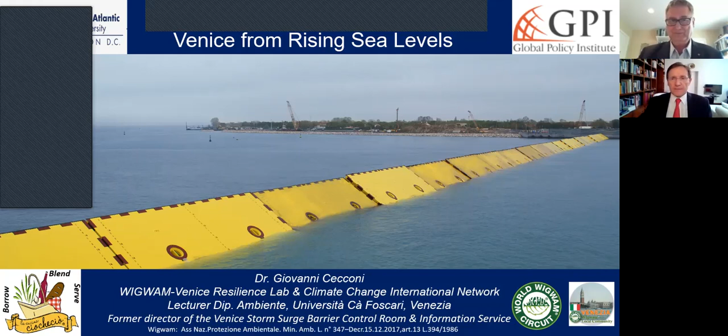Okay, Venice by itself is the history of coevolution.

Giovanni, we lost your voice. You are on mute. I was trying to remove the video because I cannot see the slide. Okay, it's better I don't touch.

So it is the history of coevolution. Coevolution is the competition and cooperation all together among water and land, the environment and the civil society, and the very secret of Venice relies on this.

And now we have to face conservation and development. Again, there must be a competition between conservation and development.

Venice is a very complex system. It's a natural lagoon, an industrial harbor, an historical city, and it has been able to maintain itself for 1,600 years. This year, by the way, we are celebrating the birthday of Venice with great celebration.

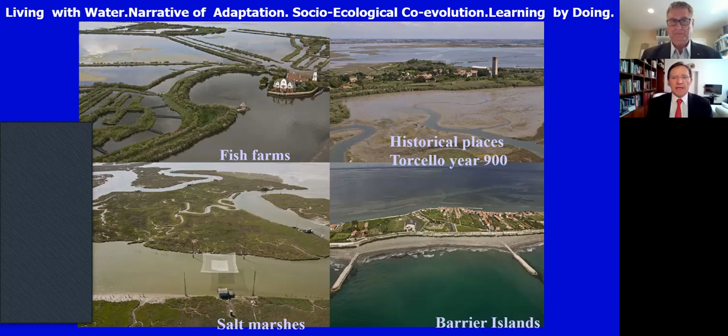Here you can see, before human intervention, the shift in the archaeological remains from Neolithic, Mesolithic, and Bronze Age due to the oscillation in the mean sea level.

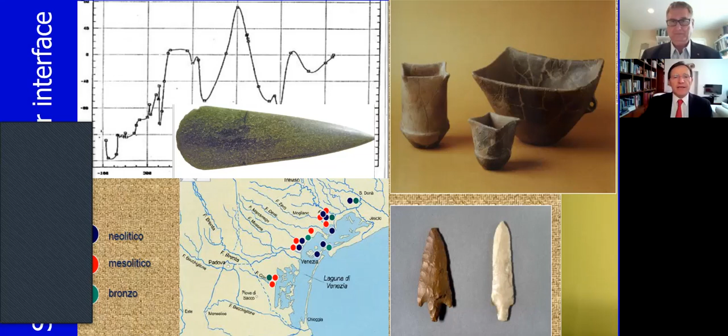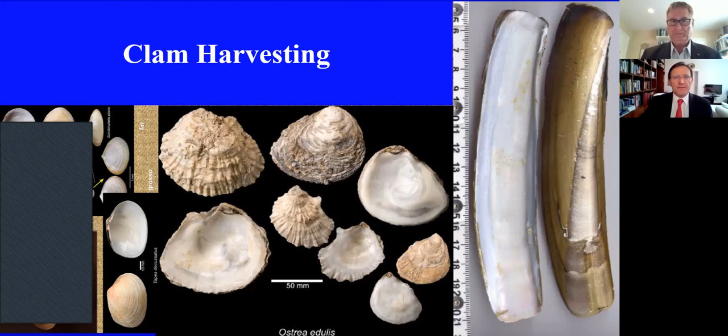But then humans entered the lagoon. They arrived searching for food, hunting and cultivation, harvesting clams, fishing, fish farming, and then they had to cope with nature because the natural system was unstable.

So with this claim, with this speech, a mathematician in 1875 asked for installing a solution. Leonardo da Vinci studied the possibility to use the natural energy of nature, the tidal energy, to flush the sand away. And this was done, but only 50 years later.

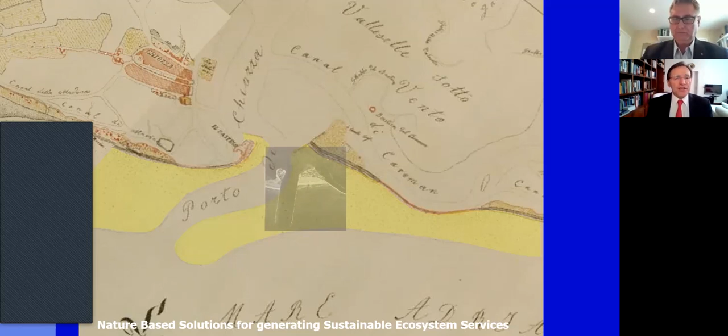This intervention can resemble a very much impacting transformation. If you do an environmental impact assessment, maybe you fail in getting the authorization. But at that time, there was no VIA regulation, and the work was done.

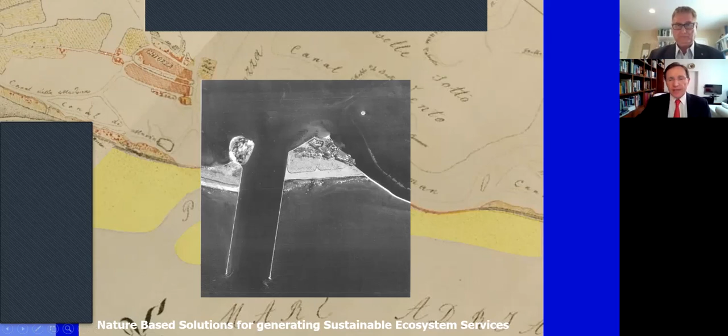And if we look now at the consequences of this huge transformation, imagine reducing the tidal inlet to one third, installing this huge inlet breakwater in order to concentrate the tidal current, make it quicker, faster, in order to scour the sand below. Bene, then what has happened?

Here you can see the site of the construction of the inlet breakwaters in this location. And we had a very long discussion installing the navigation lock to enter the lagoon when the barriers are closed in this location, because they are close to one of the most renowned natural areas that is protected by European regulation.

So the end result of that previous transformation is this magnificent dunes park in which there are many species and biodiversity. Now, my question to you is why humans are able to trigger such amazing natural transformation?

The answer is based on two constraints, two positive outcomes. First of all, availability of space. When you interact with nature, you have to give nature the space to grow. In here, there are plenty of space. In fact, this pocket trapped the littoral drift, and the wave energy and wind energy piled up the sand, and then the sun started to grow the Ammophila, a special plant that stabilizes the sand in the dune system. So space is a constraint that in this case was well respected.

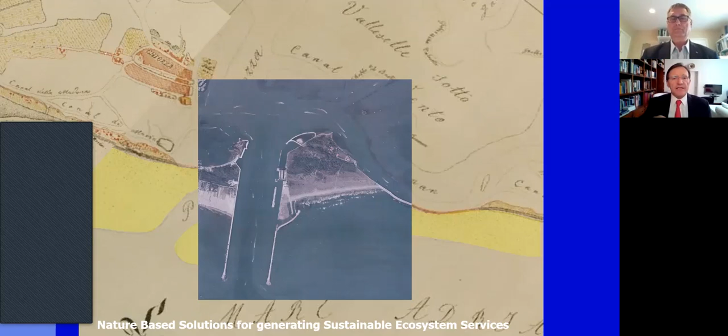Another important aspect I want to stress is the landscape you see at the very wide scale starts at the microscopic interactions among the sand, millimeter size, and among cyanobacteria and other organisms that provide stability to the sand, as is the case in this footprint. Again, this is a shelter, and in this shelter you have protection in which you can trap the nutrients and the seeds, and then in the following year you have the best melting pot to have the Ammophila.

To have the halophytic vegetation that lives in the brackish water start growing.

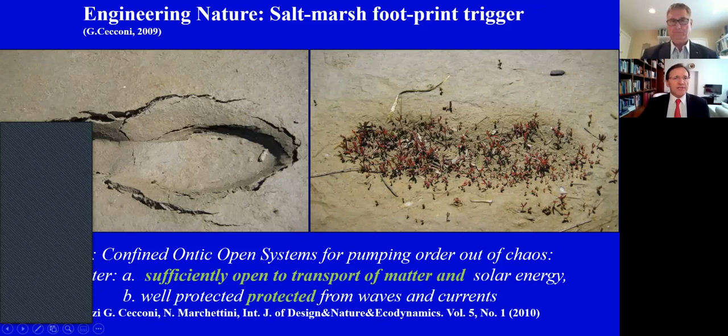We published this understanding of how nature is working in a publication here. You can see in the International Journal of Design and Nature Ecodynamics, together with Professor Tiezzi.

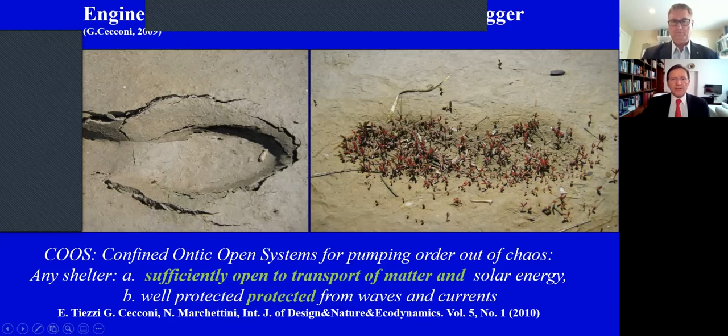And we called this behavior COOS, confined ontic. Ontic is the capability to preserve itself without awareness. Open, you must be open to the flow of energy and matter systems. And these systems are able to pump order out of chaos, providing a well-structured and fruitful environment.

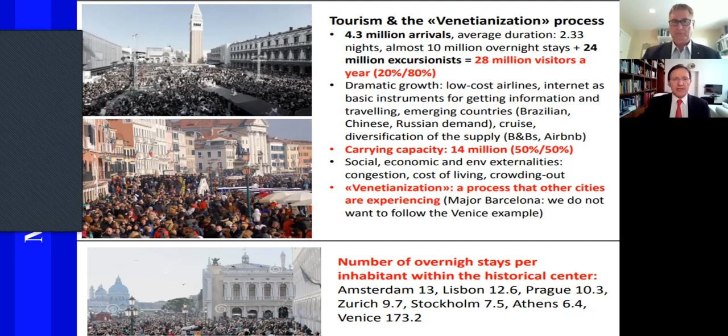But Venice is also a place in which we have mass tourism. Before COVID, we had a very serious problem coping with this flood of people entering the city with huge ships. This is because humans forgot about the equilibrium with nature.

So now we want to exploit nature in a very short time, to be in Venice in just one day, half a day, half an hour to commute from the airport to San Marco, and then go into our magnificent cruise ship and continue to travel in the Mediterranean.

This is not co-evolution between society and nature, because as you well remember, in order to be fruitful, this cooperation needs space and time. Instead, here, everything is concentrated. And so that's why it is a negative impact.

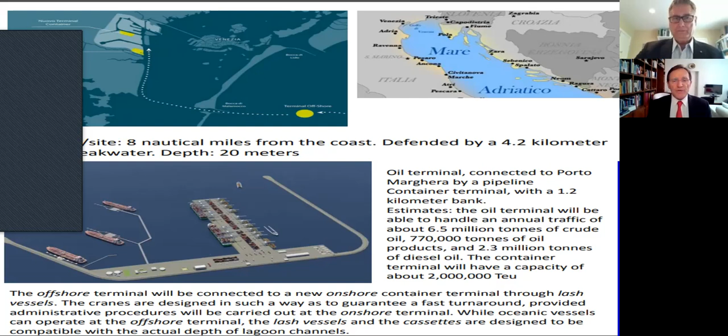Whatever you do, the impact remains because we want to travel faster. And this is the problem. Why not transform the time of travel into an opportunity? This is how nature is working. For nature, there is no dead time. Nature is continuously active to maintain its possibility to survive. And so we have to behave accordingly.

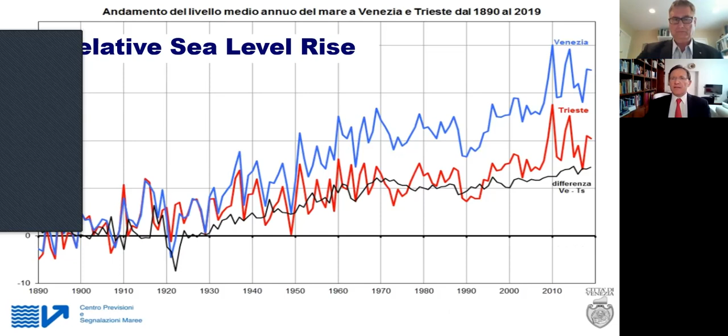Sea level rise is another challenge. Here you can see Trieste and Venice. Trieste is in a rocky area, so it's very stable, not affected by subsidence, which is the squeezing of the soil due to tectonic motion and to compaction. Instead, Venice has a weak soil, while Trieste has hard soil. And so you can see that in Venice, the sea level is rising twice as fast as in Trieste.

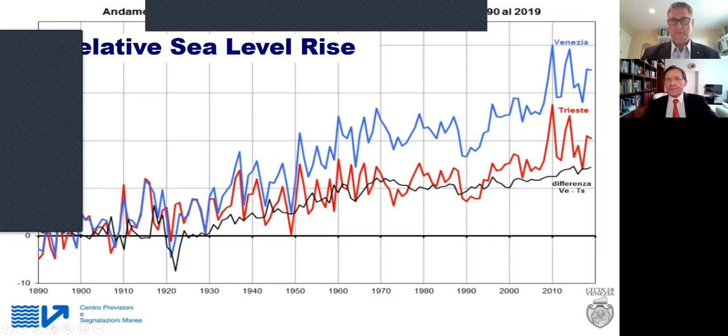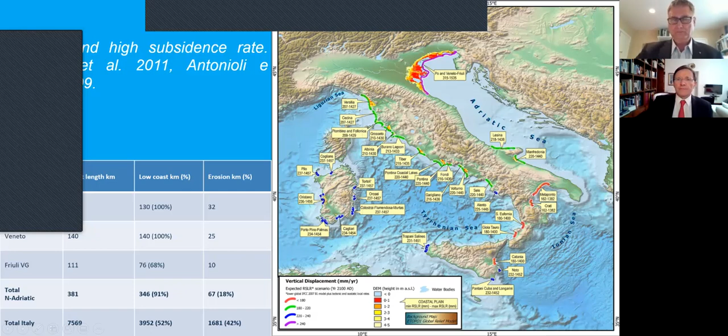The flooding is more and more frequent, and the city is flooded with higher water. Here you can see the duration of the flooding from the beginning of the century. It has been amplified by a factor of 20, and also the surface that is impacted.

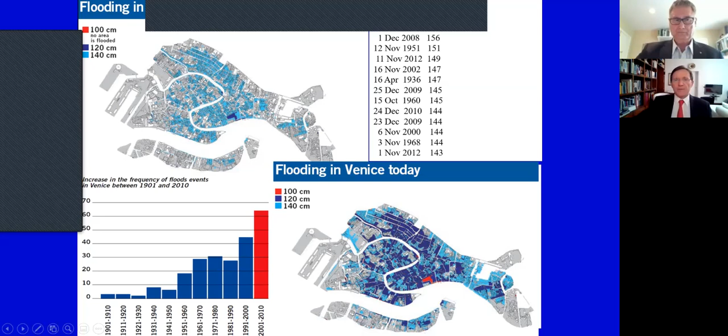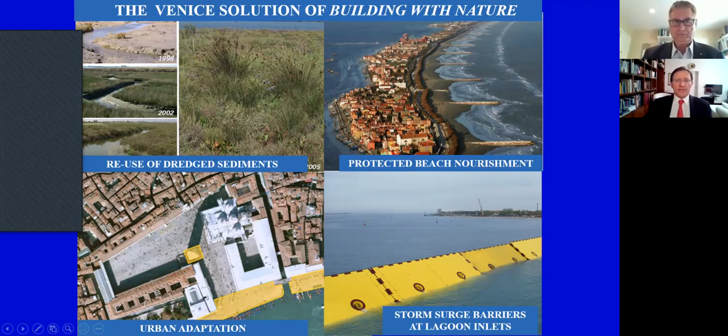The Venice solution is a combination of engineering, nature, learning and building with nature essentially, and mobile structure coupled with local protection. So we are raising the bank of the city as much as we can in order to maintain the city open. Do you remember the openness of the course? If we close too much, the city is not working. So we need to keep the city open, but at the same time protected, confined in a way, and the confinement is provided by the flood barrier. So again, the flood barrier and the local protection is the proper balance between openness and closure.

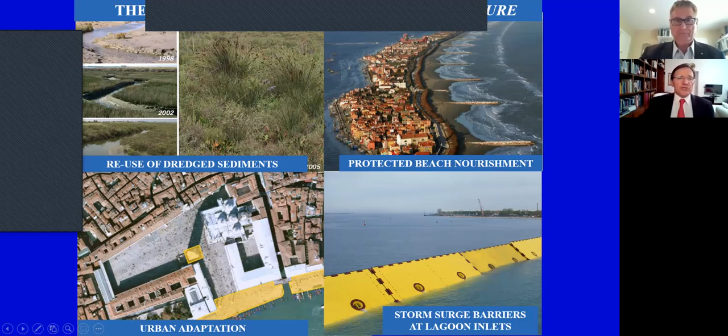This is associated with a huge reuse of sediment, sandy sediment at sea to protect the beaches, and muddy sediment inside the lagoon to construct salt marshes. This is the general scheme of intervention: a combination of a mobile barrier, coastal protection, local protection, the safeguard of the polluted sites of the past, and the local protection of historical islands.

Till now, 56 kilometers of littoral has been protected with more than 8 million cubic meters of sand, 12 kilometers of artificial dune with replanting of Ammophila has been reinstalled, and also the inlet breakwaters have been armored for a total span of 11 kilometers.

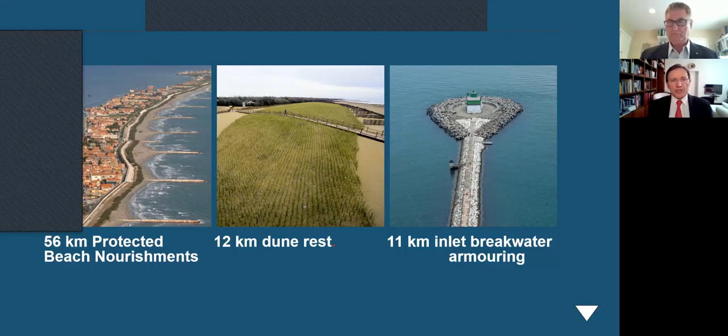Just to give you an example, we are speaking about a project in the order of 12 billion euro. Katrina required 36 billion euro, most of them to build dikes and levees. But of course, the size of the Delta of the Mississippi is 10 times the size of Venice, and the subsidence of New Orleans is much higher than the subsidence of Venice.

At a certain point, we have to think about whether adaptation and resilience is the solution, or if we have to retreat. It will depend on us. If we are able to stop sea level rise with better sequestration of CO2 and change the composition of the atmosphere in our favor, then maybe we can continue to strive on the coastline. Otherwise, we have to consider to retreat.

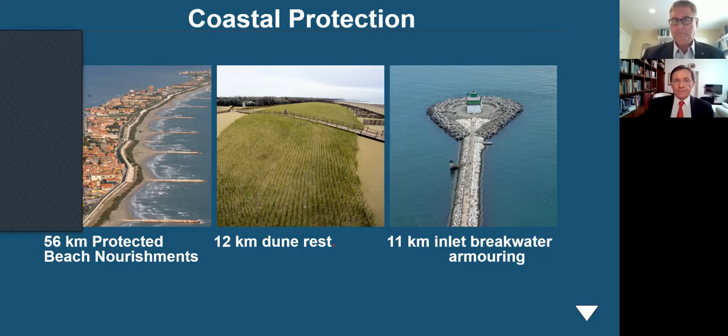For now, because we do not have any more subsidence, since we stopped the extraction of water in Venice in 1970, we can afford this solution: to install an artificial beach protected by groins and submerged breakwaters in front of the seawall, in order to reduce the impact of the wave.

But if sea level rises, let's say, half a meter, this beach will rapidly disappear because of the reflection of the wave energy against the seawall. This flexible solution is added on top of a rigid structure and cannot survive, even though it's well designed, if you change the environmental conditions. This just explains the limits of adaptation in case sea level rise happens at a speed that was not experienced before.

Other solutions refer to the reconstruction of salt marshes, reusing the dredged material from the maintenance of the harbor and navigation channels. I want to come back to this because a similar solution is in place in Galveston, Texas. And now in Galveston, my colleagues are considering installing a big storm surge barrier in the Ike Dike, as it is done here in Venice.

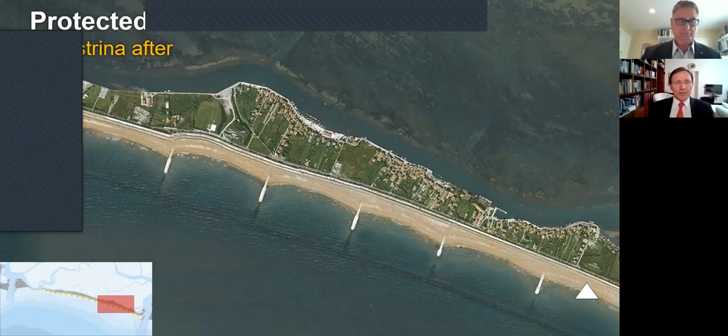We shared experience with them, and it was very interesting because for us it was a way to go back 30 years, when we were in the very beginning envisioning this future of a protected lagoon. Now looking at them taking the first steps, trying to raise consensus with public participation, for us is a way to rejuvenate ourselves. So please come again and visit us, we are more than eager to share our experience, because this is very much triggering our enthusiasm in what we are doing here, in a peer review fashion.

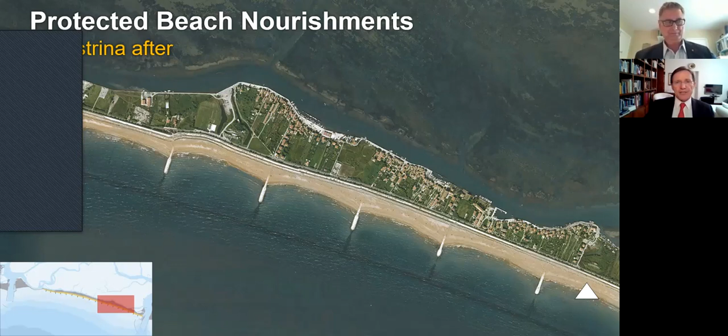So salt marshes, I said, also 39 kilometers of armoring of salt marshes, similar to what is done in the Mississippi River delta with Christmas tree branches or oyster reefs. These kinds of activities are important, not only because we help nature to help ourselves, but because we develop a community. People can do that kind of job with their bare hands, with small boats, and in this way stay connected.

Another important attribute of adaptation is interconnectivity. And interconnectivity is fundamental for resilience, because if something happens, a citizen will ring the bell and everybody will come, sharing the solution and sharing the experience, and the problem will be solved.

Instead, if you have a centralized system of supervision and control, at a certain point the unexpected comes and the system will fail because there will be nobody on alert at that moment. So the circulation of knowledge and awareness is very important, and this can be done only if you are able to pay for connectivity.

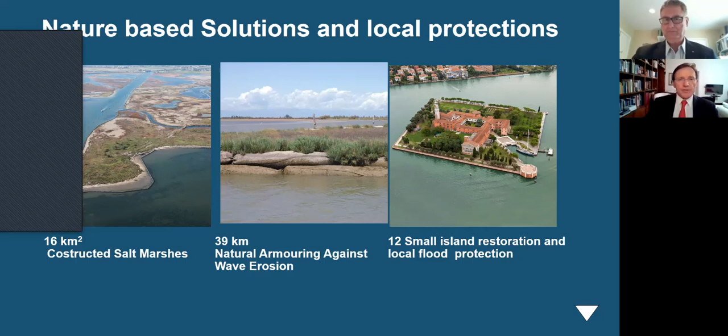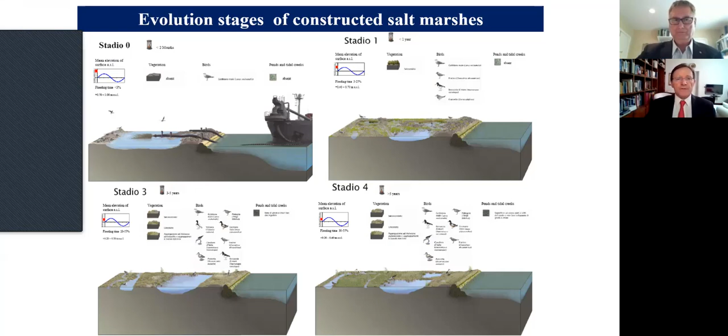But how to pay for connectivity? This is the purpose of the Lab, to create a connectivity machine that keeps the people connected in any possible way. These are the evolution of the salt marshes, the different schemes. I rushed here because this will be another lesson next time.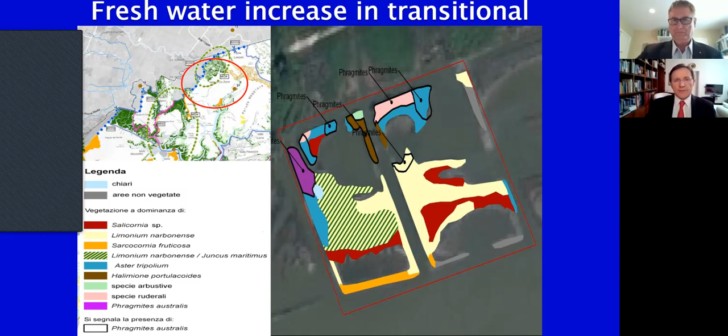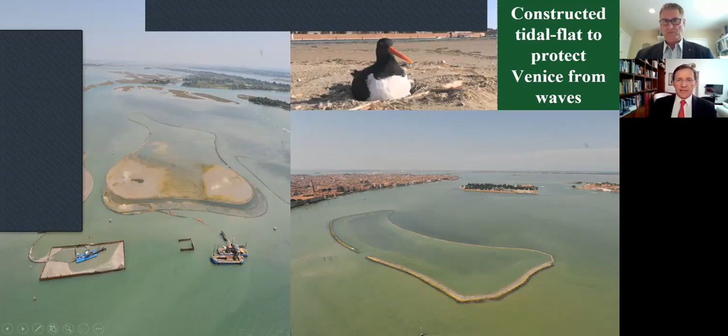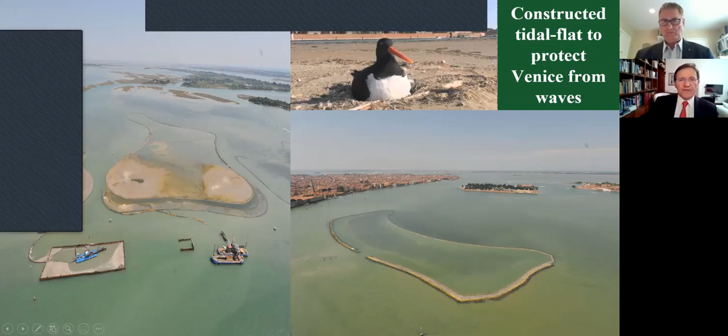You can see how it was done. Just an armoring with gabions. Gabions were deployed by this inner canal. Here you have to see that the canal was dredged internally in order to make stronger the edge that is facing the motorboats, the waves, and away from the wind. And then we filled this area with the sand from the excavation of the foundation of the barriers.

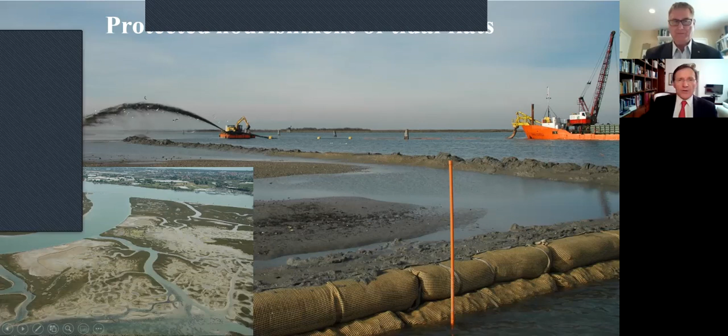Similar activities. We developed a special gabion made by geosynthetic and small stones or oyster. This is where you can see the historical pond for keeping the juveniles that will be sold to the fish farmers. This activity dates back to the 1500s. So what we did was to restore the edge of this salt marsh, hosting the fish farm, the fish pond, with new land in front.

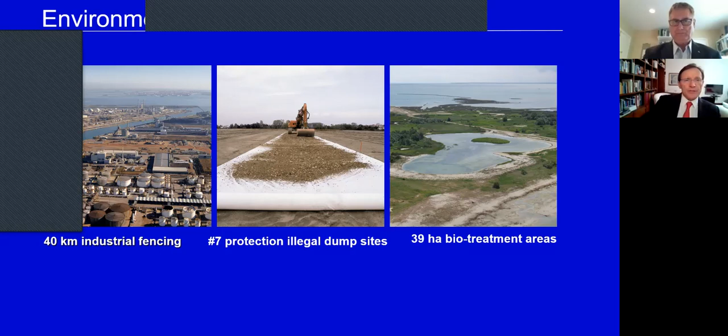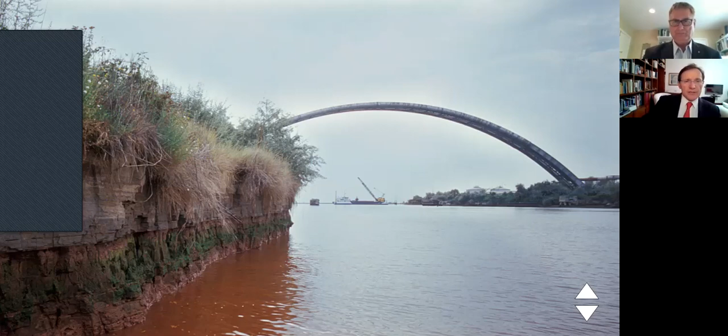This is instead the reclamation of the industrial areas that were polluting the lagoon because of the lack of a confining wall. Here you can see an example of a bauxite deposit polluted with mercury that was stabilized with this sheet piling.

Local protection. These are very important because if we want to protect Venice with mobile barriers, we would have to close almost every day. This is not viable because of the impact on navigation and the cost of the operation. At that point, it would be much more convenient to close Venice inside a ring and allow the tide to enter in and out of the lagoon. But before reaching that time, which may come in one century if we are able to stop sea level rise due to global warming, or in just 40 years if we do nothing, we have to live with this kind of solution. That is local protection.

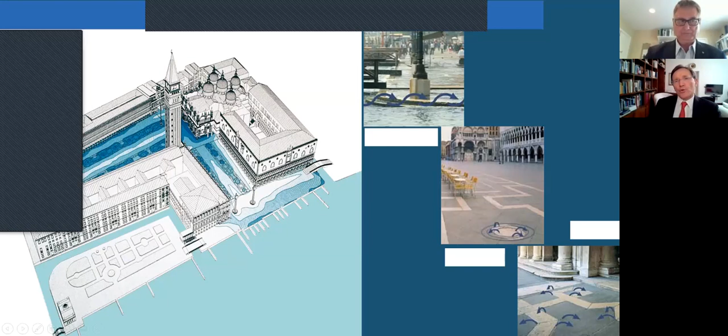100 kilometers of embankment have been elevated by 10, 20, 30 centimeters. San Marco Square has been delayed because of architectural reasons and authorization. In the beginning, we thought of this kind of solution to avoid seepage of water from the drains, from the ground, or overtopping of the bank: modify the elevation of the square, raising this area and installing a bentonite geomembrane all over the square, a kind of inverted pool. But the interaction with the marble was so big that the superintendent of fine arts decided not to go ahead with this solution.

So the present solution is to intercept all the conduits that are discharging rainwater to the lagoon, but also importing salt water in front of the basilica, in this area that is now flooded more than 200 times a year. Of course, we need to modify the slope of the pedestrian walkway to reach an elevation that is 10, 20 centimeters higher. There are special spots, like this corner of the Doge's Palace, in which we have to install some steel or glass plates.

Apart from this, we will maintain the conduits and put inflatable balloons into these restored conduits in order to automatically stop external water from entering. The work was scheduled to start on the 1st of February, a few days ago, but due to bureaucracy it has not started yet. This is one of the tasks of the Venice Lab, to facilitate the understanding of the bureaucratic problems and weak points with better interdependency between the user and the provider, in order to solve the problem as quickly as possible.

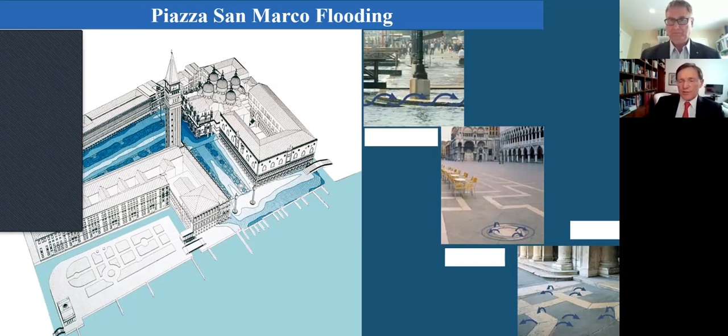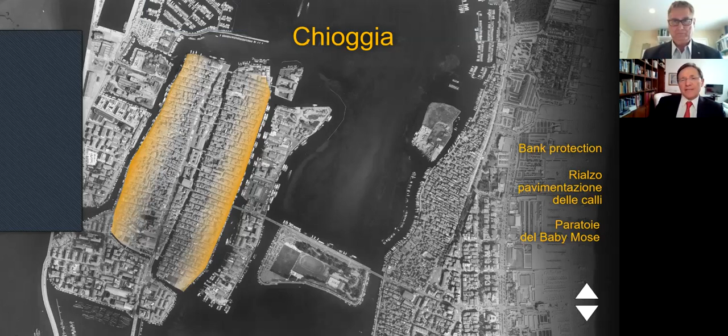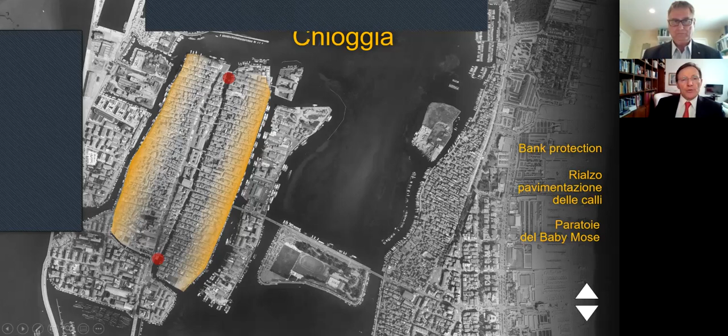Instead, in this case, we were lucky because we could raise the pedestrian walkway and install two gates at these two extremes. So in this way, all the area is protected. This is one of the gates. But these local solutions are not infinite. At a certain point, you have a limit, because if you continue to raise the pedestrian walkway, you need to raise also the roof of the building. This means to demolish and build on top.

As a famous archaeologist said, Venice has a tradition of building on top. You have to continue to demolish and build on top. But of course, not everybody agrees with this building on top. And Hammerman made a very, very strong criticism in National Geographic. You can read it, saying that the barrier is artificial, so we have to demolish and build on top. Of course, yes, very simple.

But we are not in India, in which whatever is new is nice and is interesting because they are more spiritual than us. We need our artifacts, our memories around. We are different. So any culture has its own limitation. In our case, we don't like to build on top. And that's why we try to install the barrier.

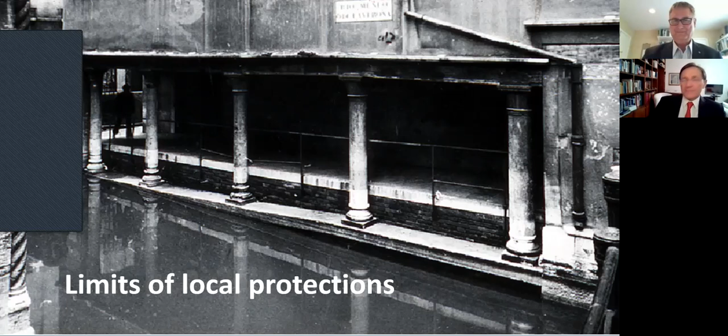Let's look at this film if it's working. So I relax a little bit and then we restart.

Thank you. So the solution is the installation of a mobile barrier at the inlets separating the lagoon from the sea. Here you can see Lido entrance, Malamocco, and Chioggia. In Lido there are two canals, so there will be 21 gates, 20 meters wide, at a depth of 6.5 meters, then 20 gates in San Nicolò, 12 meters depth. Malamocco is the deepest, minus 14 meters, because here is the navigation channel that goes to the industrial harbor. And there will be 19 gates.

So this means that the width of this inlet is 380 meters. These are two inlets of 420 and 400, and Chioggia has a width of only 360 meters. So altogether it is a mile, 1,600 meters. 78 gates, 4 inlets. So this is the mobile infrastructure. Of course, when these barriers are closed, we have a full protection of the littoral that has been reinforced with beach nourishment and seawall. And also the rivers entering the lagoon have been redirected out.

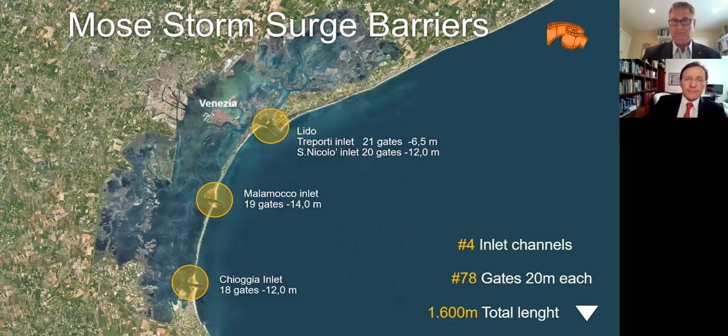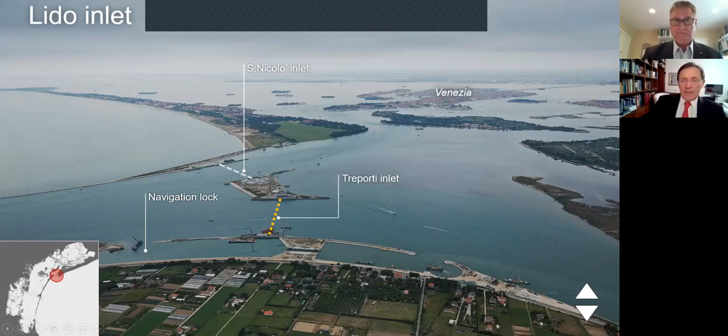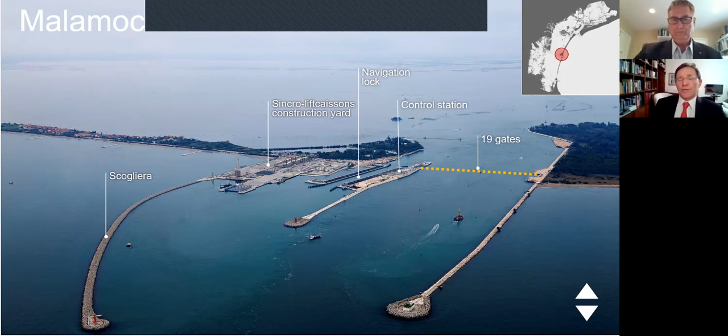These are the kind of constraints that we have here in Venice that are delaying the work, even though the work has been operated during the last 3 months almost 20 times, avoiding the recurrent flooding with very great success, as I will explain later. But it is incomplete, of course, because of the bureaucracy, because of the constraints, because of our Italian attitude.

But it is working, it is effective, as you can see in the CBS broadcast that I will distribute through the chat because we cannot see. So you have the witnessing of the functionality; even though imperfect, it is working. Maybe this is the secret of the flood barrier, an incredible solution for an impossible problem.

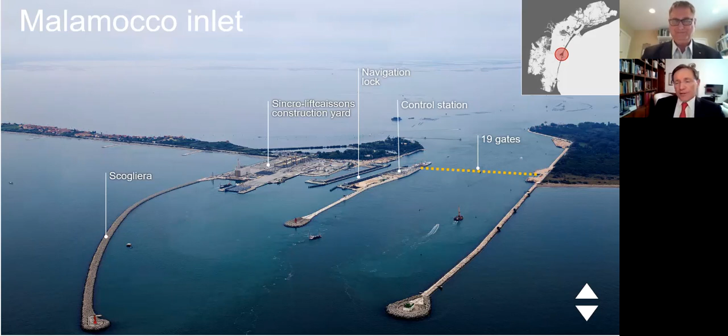Chioggia. The system is made of a reinforced foundation made of concrete. It is precast and then lowered into position from a dry dock that can be done above sea level or just in a bay that will be inundated later.

The most critical mechanical aspect of the barrier is related to the hinge that has to allow the motion of the gate from rest position to working position, and at the same time to allow the air to enter in order to raise the gate, and allow also the possibility, with a twist lock, to disconnect the gate every 5 years for maintenance.

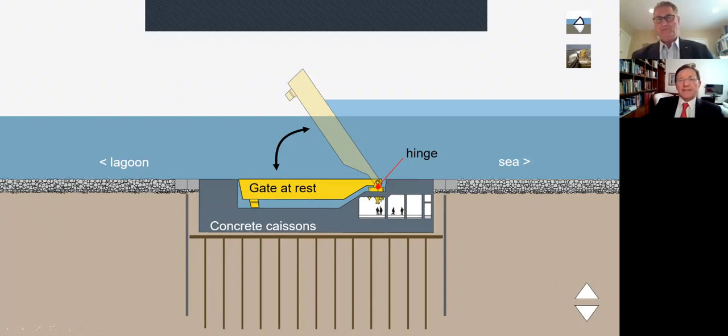This is how the gate is functioning. At rest, we start injecting air in this upper chamber. And when the momentum is able to compensate the load of the gate, at this 300 tons, the gate starts to rise. The pressure of the air reduces, and so the volume expands, and so there is an acceleration, and very rapidly, in a few seconds, the barrier will emerge.

Then, adding more air, the water can exit from a hole at this end, and so the system can stay in position with 3 meters at sea and 1 meter or less in the lagoon. When the operations are finished, it is enough to allow the air to exit inside the tunnel, and automatically the water will enter from this hole that is continuously open without any mechanical device.

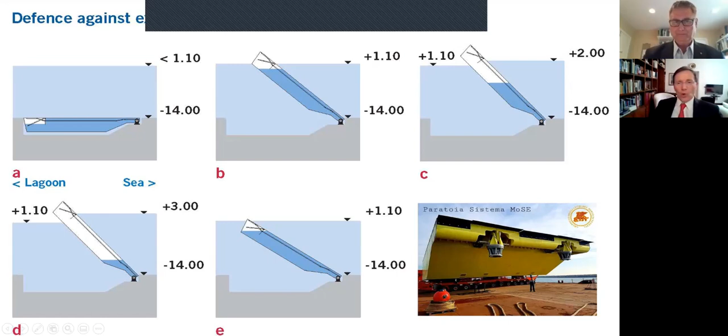So this system has no valve at all. All the valves are in the dry place inside the tunnel, and it will go down accelerated, and that's why there are dampers, as you can see. These are the dampers to stop the acceleration when it falls back.

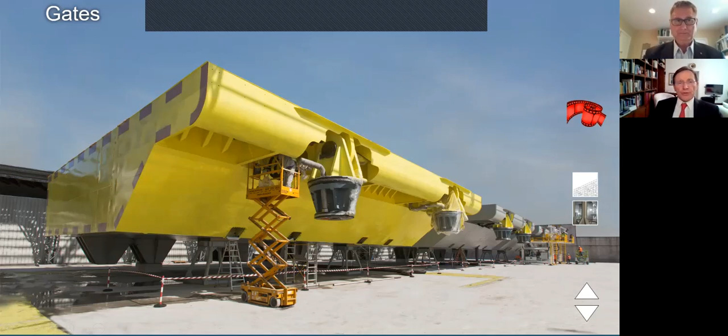The solution was chosen among many other kinds of gate, as you can see. We did more than 500 million of studies, investigation, and experiments during the first 20 years of the project. And this solution, for instance, with the intermediate piers, is cheaper but much more dangerous and not viable for Venice because of landscape limitations.

In London, there were 2 accidents. They decided to have the same gap as the London Tower, that is 60-meter piers, every 60 meters. And they had 2 accidents. One was very bad because it was a dredger that collided against the pier.

Rubber is also inexpensive, but for such a long span without piers, it's difficult to reach more than 150 meters, at least 20 years ago when we did these evaluations. Now maybe there are other kinds of material that will allow this balloon to be operated in a more robust, resistant, long-lasting solution.

This solution is also very interesting, similar to the Rotterdam system. This is a barge that is kept in a dry place aside, and brought into place just by removing the water and allowing the boat to sail to the location. But in our case, in order to have a dry dock for the barge, we would have destroyed the historical fortresses at the two sides of the entrance.

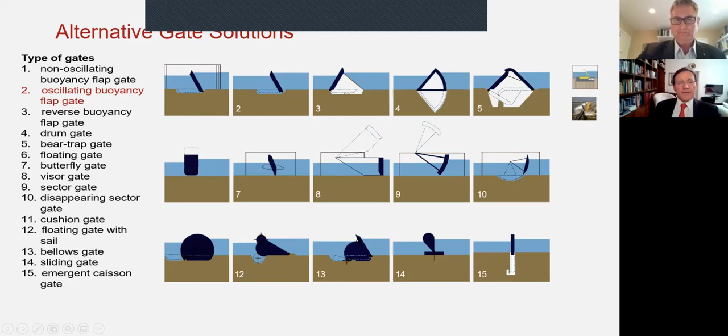Also, the weak point of this is that it is good in places without waves. If you install it in a place with waves, such as the Malamocco navigation lock experience, it will be put into motion, and the load is so big that when it hits the bottom, it will destroy any kind of foundation you can figure out, like a big hammer. In fact, this has been applied in Rotterdam and other places in which there are no significant waves or long wave oscillations.

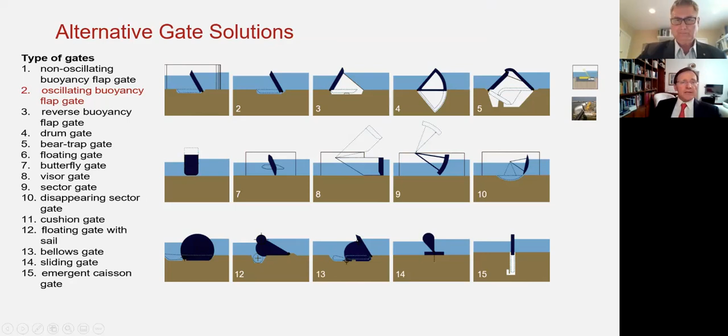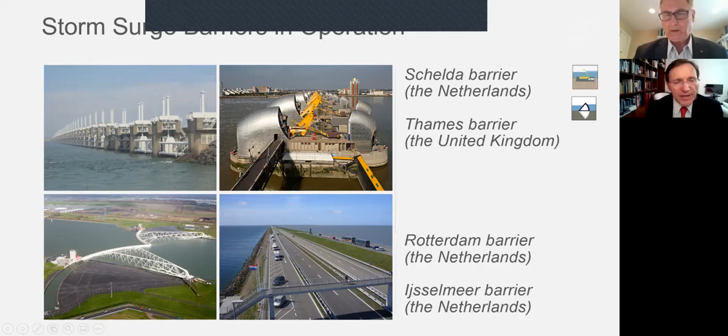So one aspect is the size and the shape of the steel structure. The other is the requirements and the operability of the structure according to the environmental conditions. So I'm not saying that you have to use the MOSE barrier. I'm saying that our solution was very challenging and not so simple compared to these other barriers.

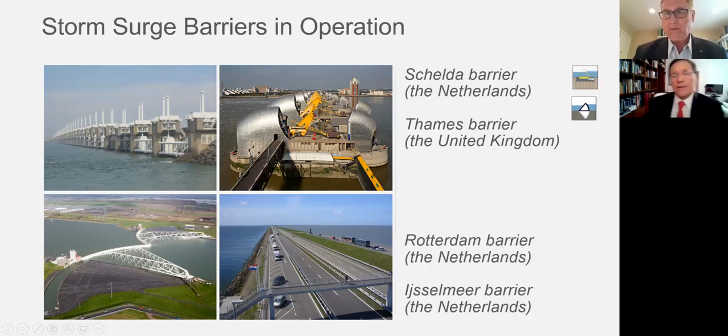Giovanni, we should probably leave some time for questions. Yes. How many minutes did I speak? So we have now another 5 minutes. 5 minutes. So I go to the end. 5 minutes to the end of the presentation. Yes. Then how much time do we have for the discussion? 5 minutes. So I need another minute just to wrap up.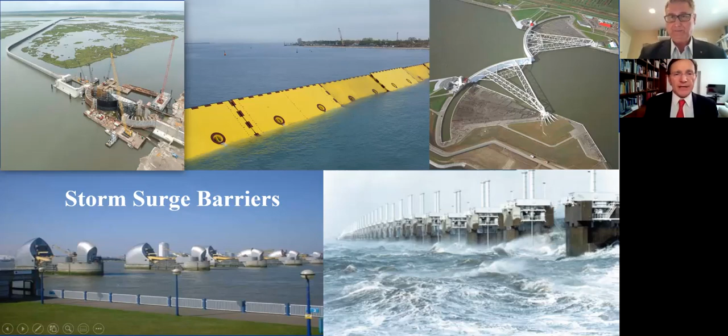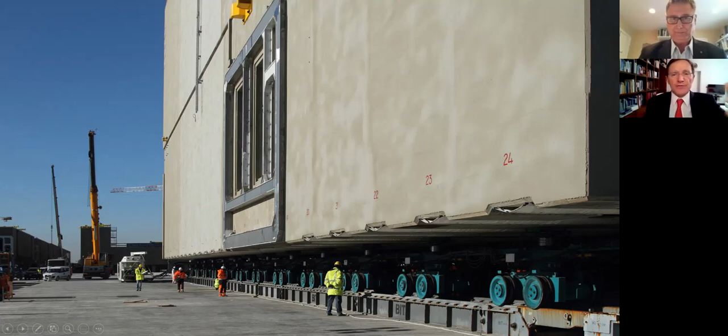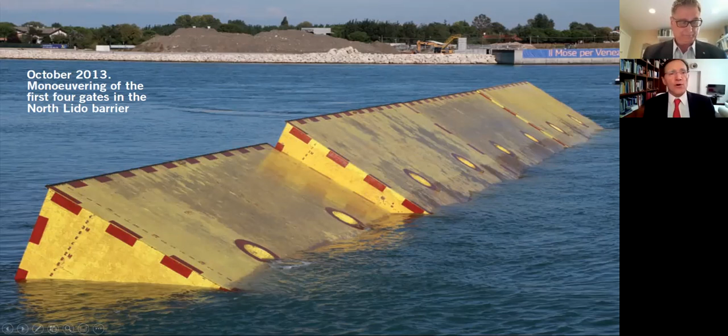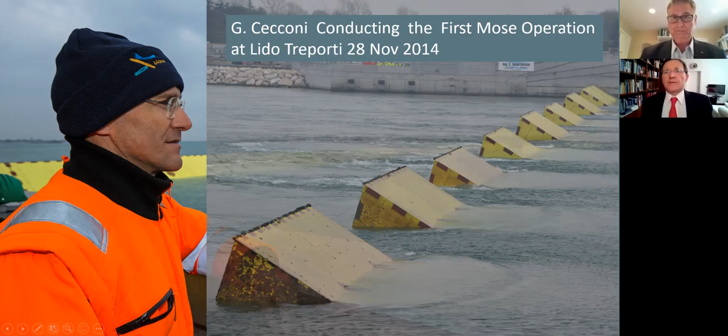Okay. So here you can see the barriers, how they are made, the monolithic caissons that were transported over rails, then to the lift, and from the lift to the water. This is what is inside the tunnels, the special hinge, male-female coupling. The first operation was done for the first 4 in 2013. I managed the rising operation in November 2014. Just incredible, it's 7 years ago.

Here you will see on YouTube the film, in the chat. The operation was started on the 3rd of October with the first testing, and it was decided to operate the barrier, even though incomplete, in a flexible way. The maintenance is very important. We have to decide if we keep it in Venice as a way to trigger the economic development of Venice, different from tourism, or bring it far from the city.

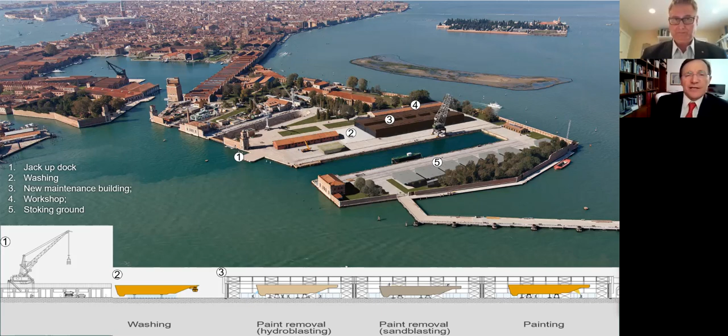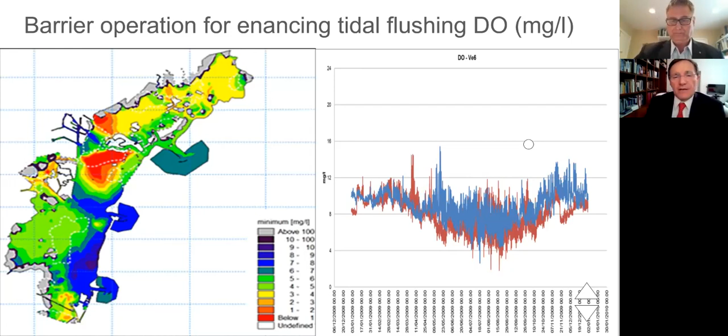The handover of the barrier is expected to start on 1st January 2022, so at the end of this year, to the new authority that I expect, if you sign my petition, will be ALMA, Agenzia Lagunare Magistrato alle Acque, to go back to the historical institution of Venice over the last 1,600 years. Thank you.

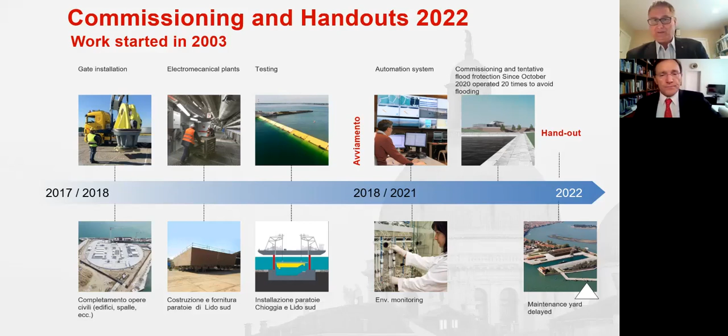Thank you, Giovanni, for this very comprehensive presentation of this project. We see that it is not just the barriers, but includes a lot of other structures that have been constructed in the lagoon and in coastal protection along those

breakwaters. One question that I could have, if I may: if you want to give us an overview of the principle and the factors that will affect the full or the partial closing of the gates. Can you repeat? Because I was reading a question, I was distracted. So, just if you want to give us an overview of the principle and the factors that will affect the full or the partial closing of the gates.

Essentially, we can use completely closing the full lagoon or use the hydraulic impedance. The flooding is modulated by the astronomical tide. So every 6 hours it comes up and then goes down. This means that we can use the time of travel of the water and use the capacity of the lagoon in order to damp this wave. This can be done if we want to reduce the flooding by something like 15, 20 centimeters. We can close only the northern entrance.